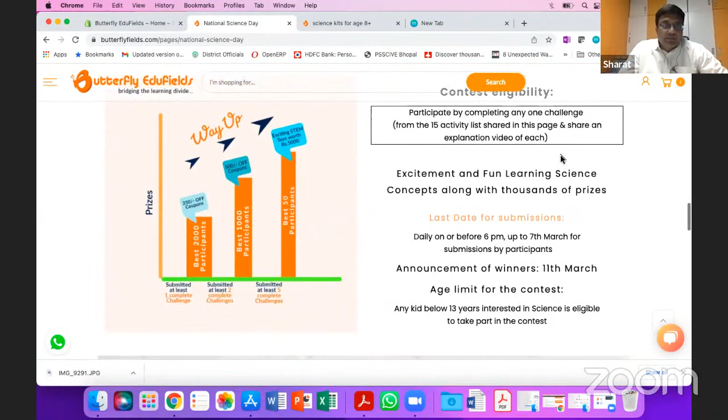So this is all part of the contests, and since schools are just starting to open up from next week, we are encouraging kids to do stuff at home, like learning how submarines work.

We believe that understanding is thorough when we can explain it to a 6-year-old child. As simple as that, how parachutes work, how animations are made, how holograms work. So different science and technology concepts for children, shown through videos.

There are also a number of kits available for children to understand the concept of rainwater harvesting. This was created so that children also understand the importance of sustainability, how much water gets wasted, how to calculate through the area, and how many centimeters of rain fall.

This is some effort, and I was personally privileged to get a chance to interact with Dr. APJ Kalam, when he said this should not just be a privilege for private school students, but that we should make an effort to reach out to children across the country, those who are less privileged.

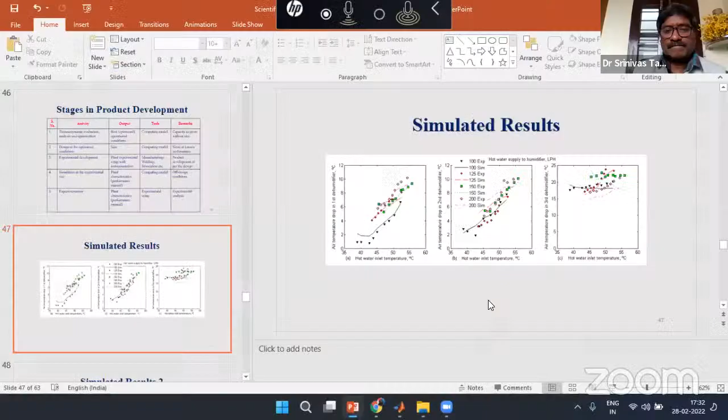As per the time permits, I will restrict my presentation to a few examples only. My presentation is focused on scientific and engineering approaches for sustainable solutions.

Science is actually a language of engineers. We are all aware that without science, it is difficult to develop technologies. It supports the dreams, the imagination. So the development of technology with the support of science is good; otherwise, without the support of science, it's incomplete or not perfect. Today my role is mainly to share my journey of technology development with the support of science. During this journey I have a few examples, mainly related to sustainability, how to practice sustainability while developing technology with the incorporation of scientific approaches and methods. So initially, I'm giving a light on the role of science in technology development and sustainable technologies.

Since renewable energy practices sustainable methods, solar energy is a main base for all renewable energy resources. For example, the solar concentrating collector is one way to practice sustainable methods for collecting the maximum amount of solar energy, so that we can develop solar collection, storage, and utilization.

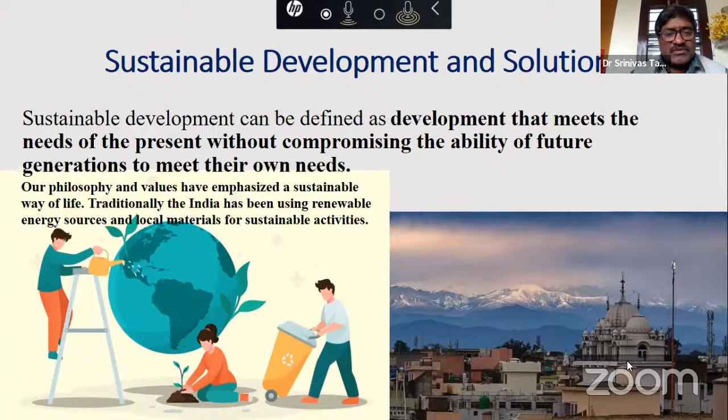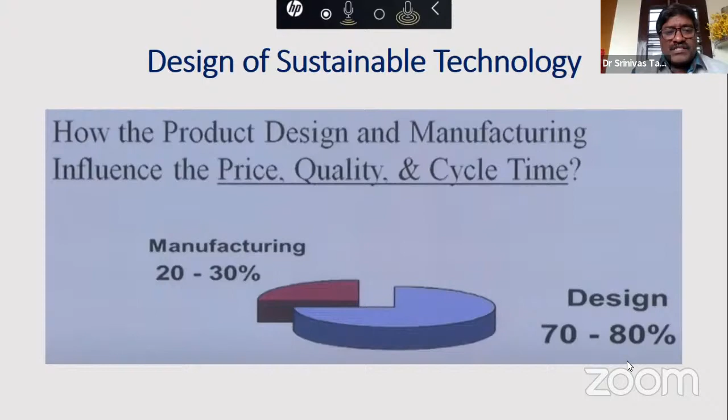In the development of technology, design plays a major role, because most decisions and policy making happen at the time of design. Coming to manufacturing, we see the development of the technology—product making or process making—done as per the design. That's why product design and manufacturing have different roles. The first and primary function is design, followed by making, that's manufacturing. The design governs the price, quality, and cycle time.

What I'm showing here is how to incorporate these basic rules of science in technology development, with the main focus given on design. For example, from 1818 to 1970, features have been incorporated over time into a product, and now we see a well-defined product with multiple features.

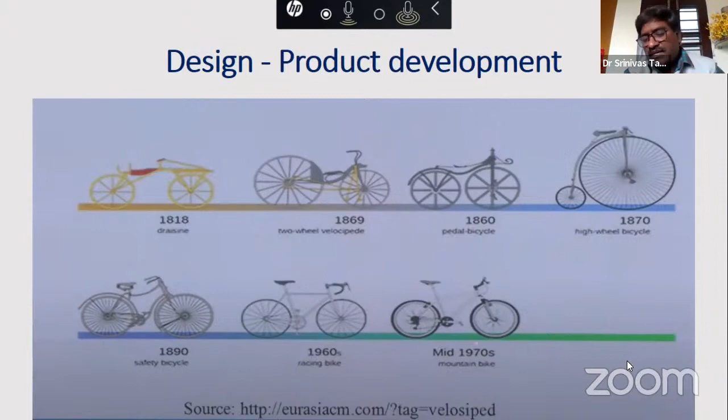In this product making, there are many steps, which can be grouped into non-engineering and engineering activities. Non-engineering mainly focuses on market survey, economics, etc. Engineering has the functions of product design, which includes modeling, simulation, optimization, and cost estimation.

Non-engineering starts from defining the need of the product and finding the probability of success—if it's a low probability, we drop that idea; if high probability, we approach market analysis and planning of the product. Then there's a feasibility check, whether it's practically feasible or not. If feasible, we give design instructions to manufacturing—that's product making.

During these steps, if we feel there is a refinement needed in the product design, or a chance of redesigning, the feedback can be incorporated into the R&D department. The customers may say the idea is not feasible, or the idea may change completely. That's why it may be iterated with the new idea, and we can repeat the cycle again.

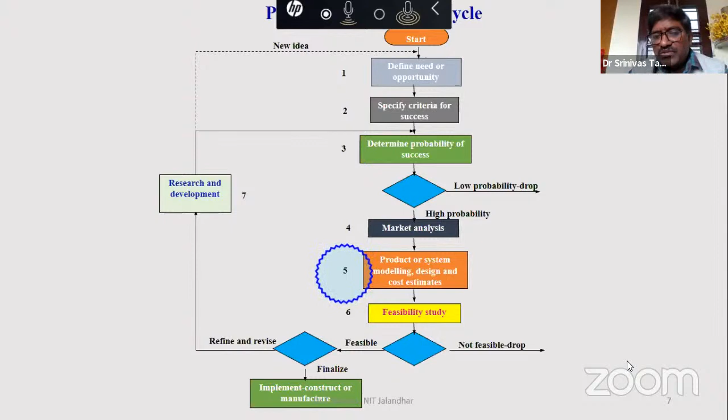If the engineer follows all these steps, both non-engineering and engineering, it's easy to develop a refined, perfect product with the help of scientific guidelines. According to science, it can be grouped, especially in product manufacturing and design.

Two categories we can group into: one is pre-design activities, and the next is post-design. In pre-design, mostly the focus is without minding the dimensions.

For example, to design an air conditioning unit, we generally specify the capacity required, let's say 2 tons. For 2 tons of air conditioning, we can design the process conditions like pressure and flow rate required, and how much refrigerant we have to charge in the machine, without minding the size or dimensions.

So pre-design work gives the best conditions, meaning optimized conditions based on parametric optimization or design optimization. From this, we can prepare the specifications.

According to the given specifications, a company or industry can manufacture the product and then undergo testing for market launch. But after launching into the market, there are some activities too. Those are called post-design activities.

In fact, the post-design activities give more useful information compared to pre-design. Of course, pre-design is mandatory as the platform for the design. If you see any product, it is very difficult to operate at design conditions due to variables.

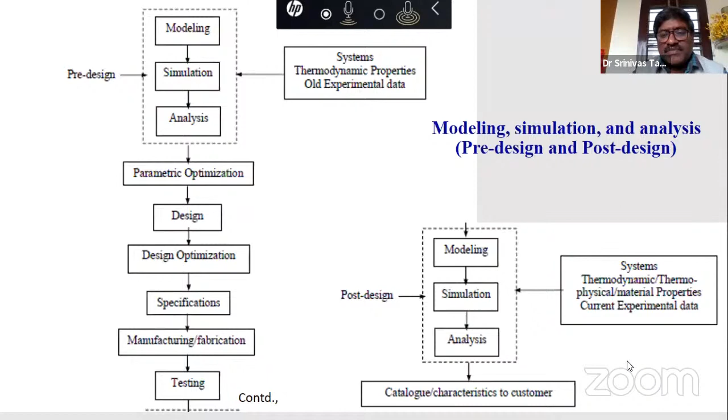So the customer may expect some catalog or characteristics of the product, which gives more useful information for operation. In pre-design and post-design, science plays a major role, providing useful data for manufacturing as well as from the customer point of view. We can prepare specifications as well as catalogs or books from the post-design works.

To demonstrate these scientific activities and planning, especially for pre-design as well as post-design works and modeling, I'm giving a few examples here. The first one is tracking of the collector, meaning how to track the solar collector from one point to another.

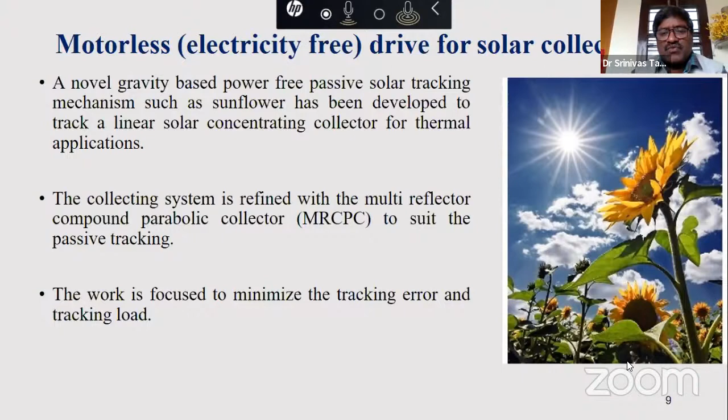Here our target is that we are not supposed to use any battery or motor electricity. That is the constraint here. According to our constraints, we are not going to use any electricity. That's why we are calling this product Motorless, or a passive type of solar tracking system that can be used to drive the collector, especially the focused collector, maybe a line-focused collector or point-focused collector.

It has been designed to be compact, meaning a lightweight product. It looks like a perpetual motion machine. As per thermodynamics, there is no such thing as a perpetual motion machine. This is imagination only, but to describe the nature of the laws of thermodynamics, this concept has been introduced.

What I am saying is this motorless tracking looks like a perpetual motion machine. It's not using any electricity, meaning there is no energy conversion visible. It is using energy, but not in a visual form—it looks like magic. That means one form of energy is converted into another form of energy; instead of electricity, we may use stored energy.

Even in the earlier days, in place of petrol and diesel, if you are pouring water and saying that we can run the vehicle, somebody may laugh, but that's possible. You know what has the hydrogen? Hydrogen can be used to drive the fuel cell that may be used in automobiles. So similar to what fuel cell car and automobile, it's possible to drive the collector using this water.

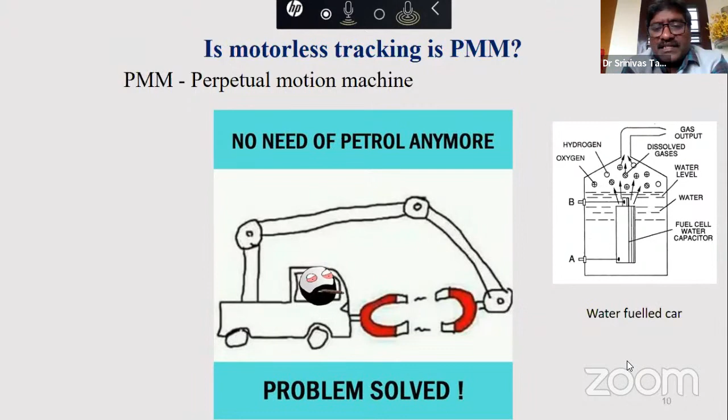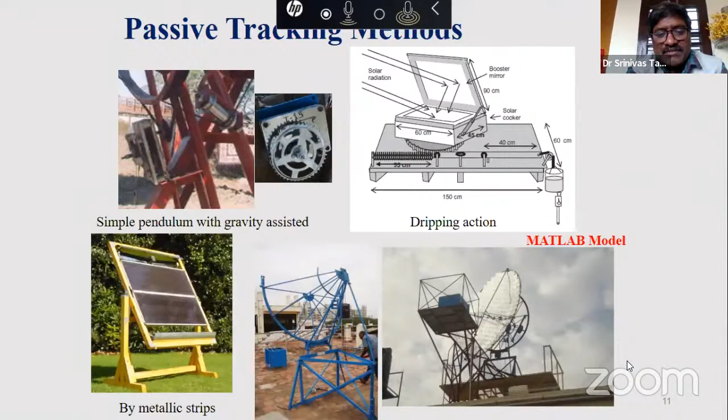That's why it may not be water, maybe some other potential energy or kinetic energy we can use, like action of the simple pendulum, action of water like dripping action, or bimetallic strips, and gravitational energy like dead weight here. And here we use the scientific principles.

The main science involved here is the solar geometry. So we need to understand the solar geometry, sun-earth relations, so that it's easy to design the solar concentrating collectors. That's dynamically changing from sunrise to sunset, and yearly also it is changing. And place to place also this geometry is changing. First of all, we have to clearly understand the background science, so that it's easy to design a collector.

It's with a zero incidence angle. That means always, like sunflower, it's possible to tilt the face of the collector towards the sun, so that the normal to the surface and the sunbeam both will be the same line. We will expect the zero incidence angle. That is the target. That means the sunbeam as well as the normal to the collector, if both are matching, then we can say this is a perfect tracking system. That means zero incidence angle, theta is equal to 0.

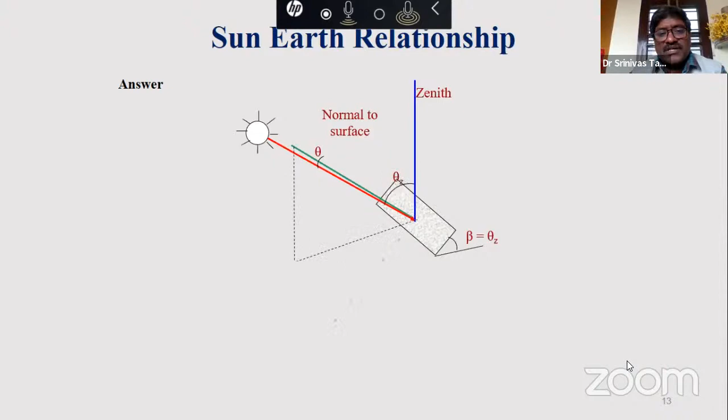So during this design, it may be single axis tracking or double axis tracking. We have to keep in mind this solar geometry. At the same time, we have to put into constraints whether the product we are designing is compatible to all places like north, south, or other countries.

Because the day length is changing. Some places, at the poles, the day length is 24 hours with 6 months night and 6 months daytime, whereas at the equator it is 12 hours almost. So here the day length is changing. Whatever product we are designing, it has to work in all places and all seasons.

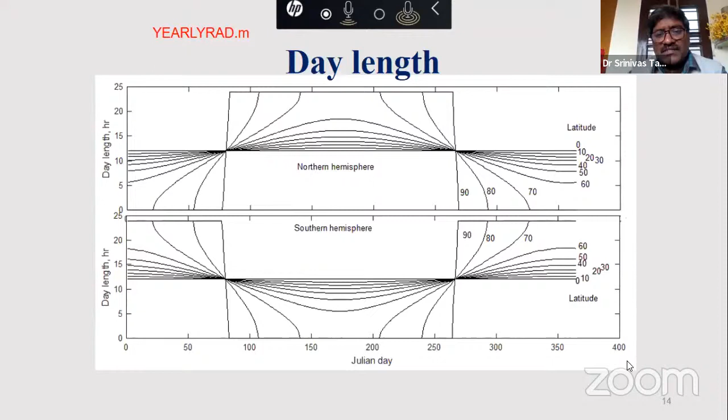That's why, for example, if it is designed at a certain angle, 30 degrees in Jalandhar, we have to select the maximum length, let's say summer. We selected the maximum summer because the day length in summer is long. That's why, according to the long day, it is designed.

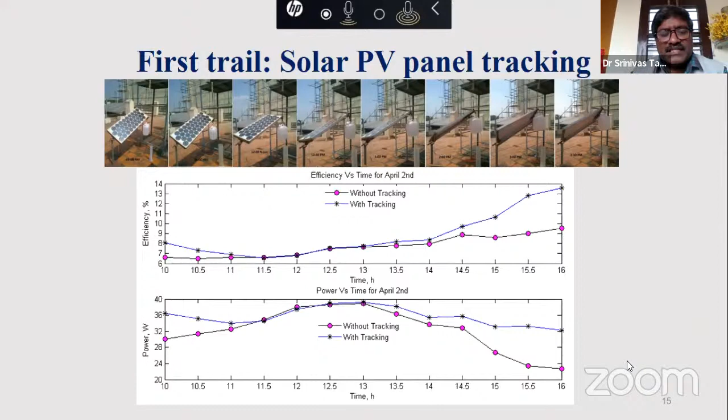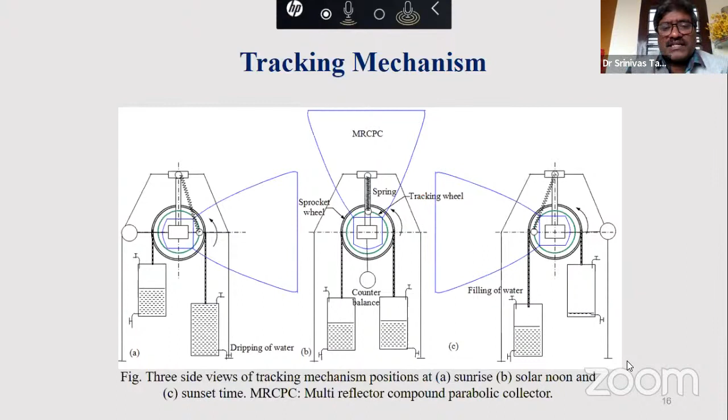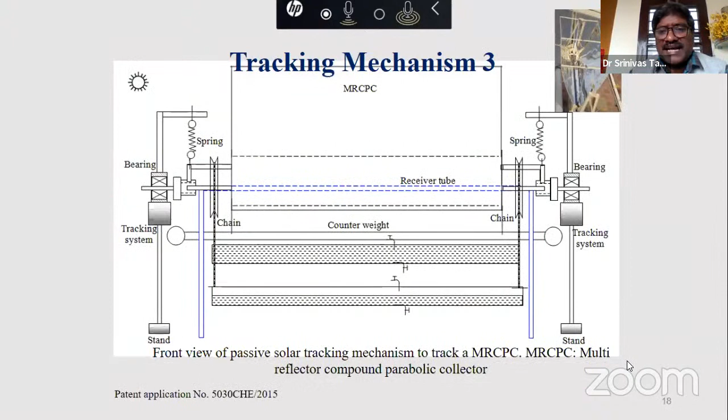At the initial step, we successfully tracked the collector, like we are seeing the small solar PV panel. Without using electricity, we are able to track the collector from sunrise to sunset. In the second step, second trial, linear concentrating collectors like parabolic collector, compound parabolic collector, or cylindrical parabolic collector, we try to track from one point to another point. All the elements here are mechanical elements. You can see the tracking systems having mechanical components like suspensions, etc.

While designing, we can choose some options like there are some drives. The shaft we can drive about the focus point, or about the center of gravity, or about a point outside the collector. Out of these 3 points, every option has certain merits and demerits. That's why there is a chance to optimize the system, and based on this comparative study, we can select the best one.

For example, about the focus, it's fine because the receiver tube need not move; the fluid we can supply at the inlet as well as the outlet without moving the receiver. That is one of the advantages. That means the solar receiver is a stationary element. Without disturbing the receiver, we can transfer the fluid. Whereas in the second and third options, the receiver is not stationary, it is moving because it is away from the point of tracking.

But there is an advantage with center of gravity: there is no need of counterbalance while tracking, because we will add the counterbalance for the equilibrium movement of the collector from one point to another point. But in the last option, a point outside the collector, there is more rigidity we can expect from this collector because the shaft is complete, whereas in the first and second methods, the shaft is not complete, it's in segments.

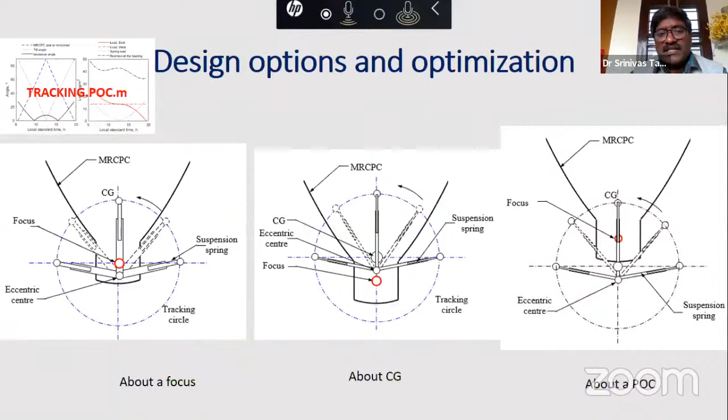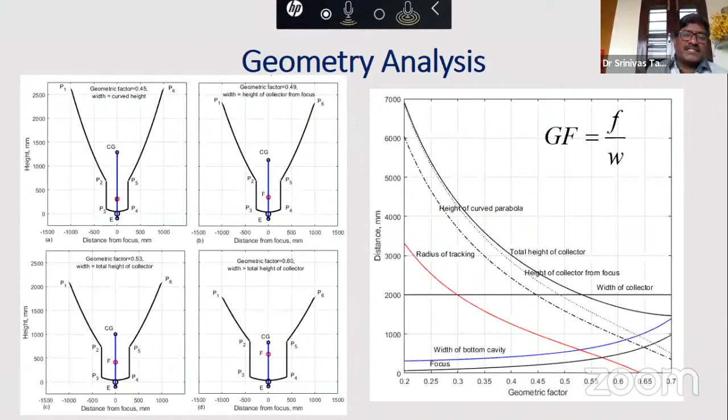During the design, we can check these options and see optimizations like geometrical or parametric optimization. This is shaped optimization. If you see a geometric factor like focus and cavity width, increasing this geometric factor increases the shape of the collector. That means to gain maximum collection efficiency, we can select a higher geometry factor because the collector is opening and the center of gravity is moving towards the ground. Even in automobile engineering, if the height of the vehicle decreases, more stability is expected. Here also, we can expect more stability from the solar collector.

Then the science has been applied for the dynamic study, modeling this collector from sunrise to sunset, that means morning to noon, again noon to evening. It gives the physical conditions like how much weight is required to track the collector, because the potential energy has been used to drive it, and that has been simulated from sunrise to noon, again noon to sunset.

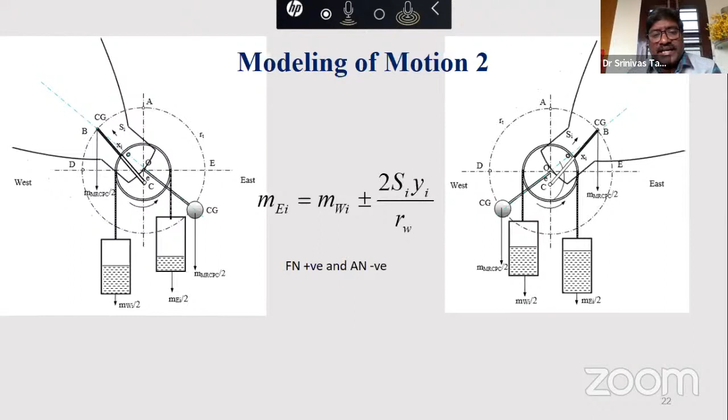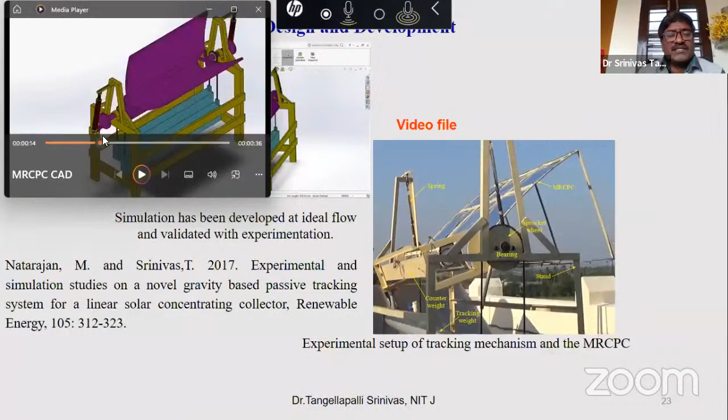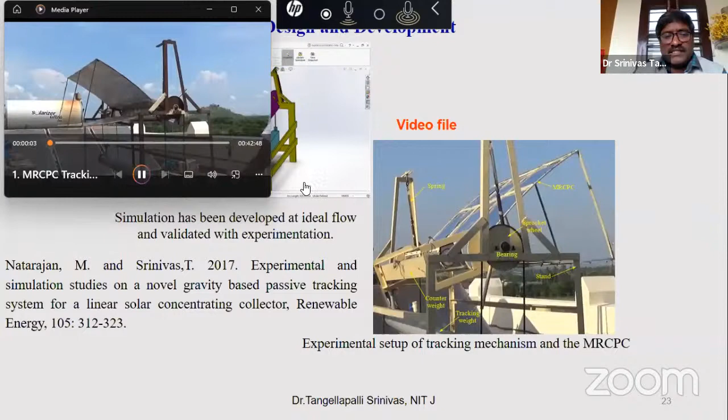I'll show the imagination and planning of this collector in terms of scientific tools, like software such as CAD and modeling, etc. After getting some idea, this science shows how the product can be manufactured and what the basic elements of this product are, how it is working. Then we can switch into making according to the instructions provided by this design. That means both are integrated, that is the design process. The first one is the design process and second is the manufacturing.

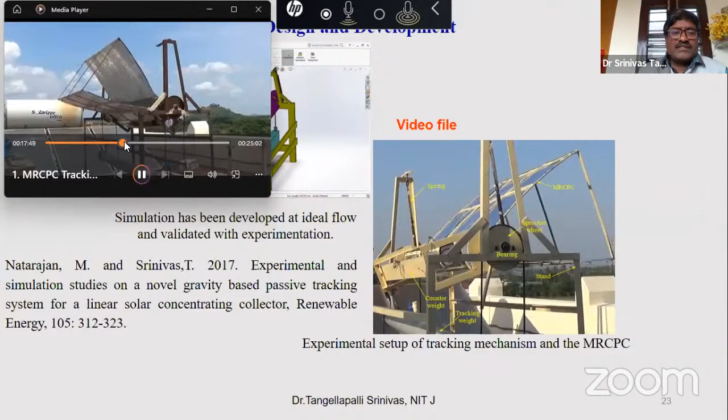But we have to take care about the design. Once there is a mistake in the design, it is very difficult to fix, because there is a lot of loss in making a product from a wrong design. That's why at each and every step in the design we have to take care before making the product.

There are many highlights we can show from this product. One is the tracking element here, which is independent of the weight of the collector. That means we are giving some mechanical elements like suspension, springs, etc. Since the counterbalance takes care of the mass of the collector, the tracking mechanism is independent of the solar collector's mass. That means the collector may have 100 kg weight or 1000 kg of weight, and without bothering about this mass, we can design this mechanism. That is one of the main advantages of this system.

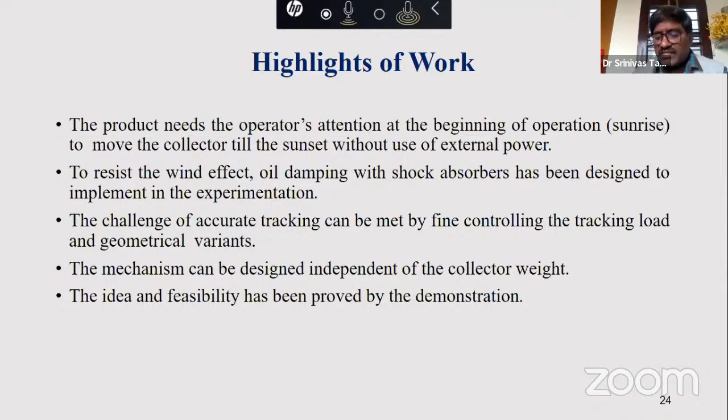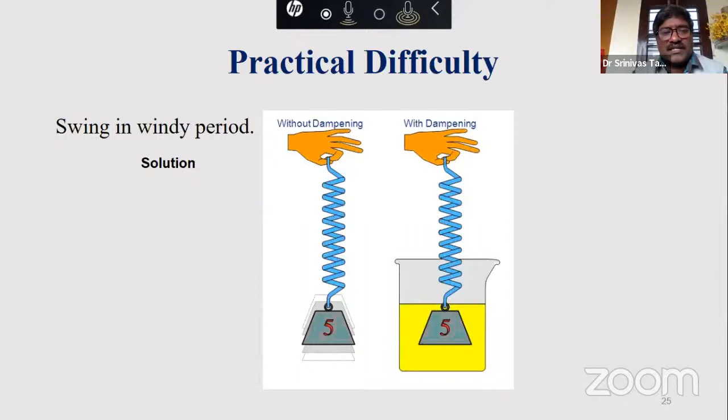This is the invention. But during this process of implementation, that is testing, we didn't include damping. That means we simply used dry springs without minding the damping. But from feedback obtained from the field, we added dampers and suspensions so that now it's driving without much vibrations, because sometimes during windy times, vibrations and oscillations come that are completely arrested by these damping solutions.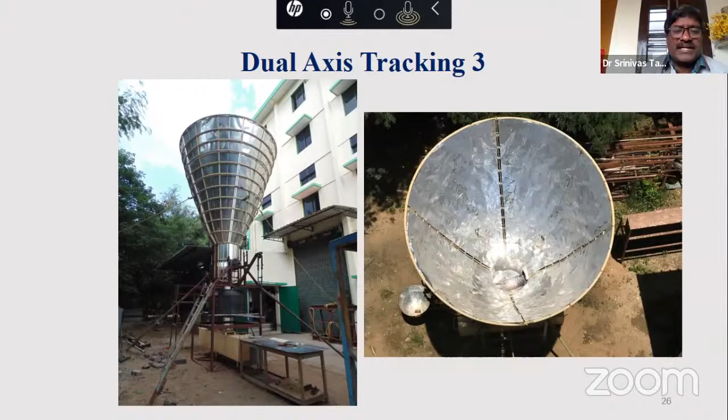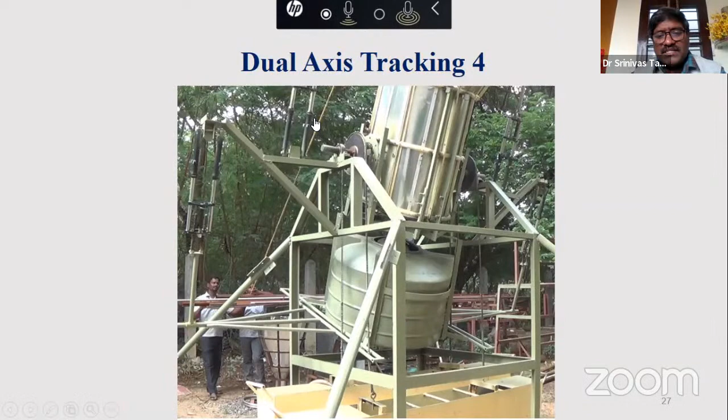Now what are the ideas I'm explaining here? It may not be plane areas or linear like a cylindrical concentrating collector. This can also be applied for a point-focused concentrating collector, which can be used for very high temperature generation. This is a point-focused collector. The weight of the collector is nearly 1 ton, and you can also see the suspensions here. We use hydraulic suspensions from the automobile industry, and its backside is a counterbalance, and it is running without much vibrations.

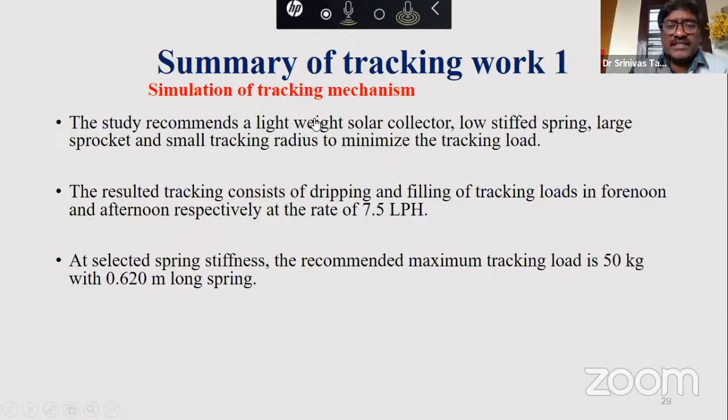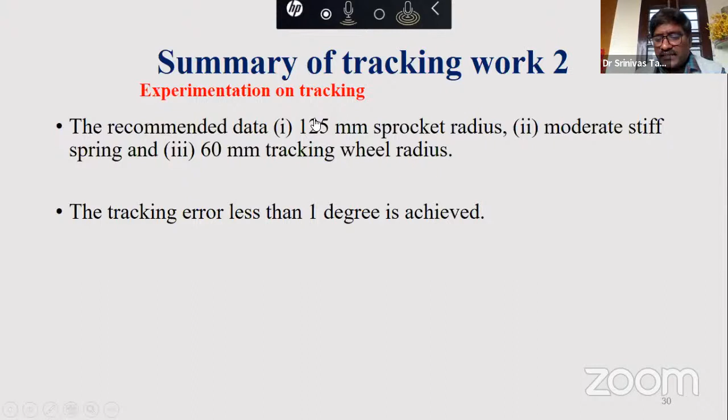This scientific work, modeling and simulation in both pre-design and post-design, results in specifications like how much flow rate we have to maintain, how to control the lowest weight of this mechanism—everything we can optimize. These are some of the results regarding the elements and quality of the mechanical elements, like stiffness and sizes, dimensions of wheels, sprockets, etc., and how much accuracy we can expect here. We got less than 1 degree error, which can also be refined further in future iterations of this product.

Similarly, the second point is the integration of systems like energy systems for multiple benefits, like I told earlier about the smartphone—similarly the features of the phone like video, photo, internet, WhatsApp, etc. have been integrated. Energy also—if you see the systems, if you combine the energies, there's no need to purchase different systems separately, like an RO plant at home, lighting, air conditioning, and cooling system.

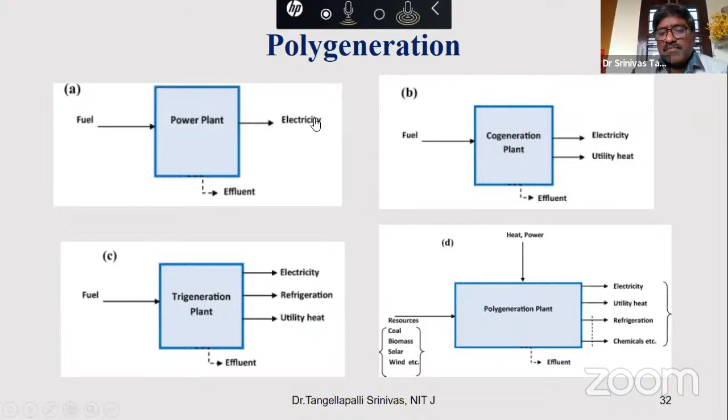There are many applications in cooking. If you think about a complete total system like polygeneration, it is derived from cogeneration and trigeneration. That means multiple benefits from one energy source, similar to how a smartphone gives multiple functions from one device.

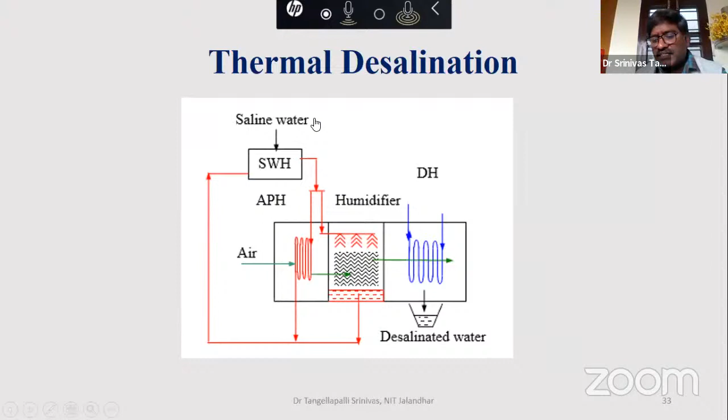This has been practiced with the desalination plant, which has been created using an artificial water cycle. We know rain comes through the basic principle of the water cycle, so the same cycle can be created artificially to get condensation, which can then be used to create soft water.

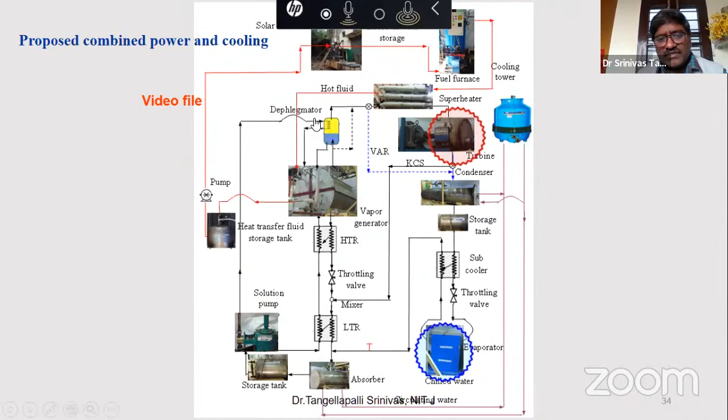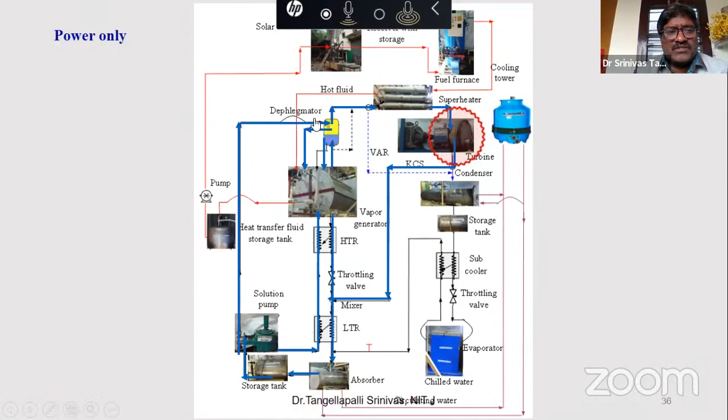This slide shows the integration of two elements, electricity generation and cooling effect, from a single source of energy - solar energy. This gives flexibility. Once we integrate different elements, we get more flexibility in operation, meaning mode 1, mode 2, mode 3, etc. - only power, only cooling, or combined power and cooling.

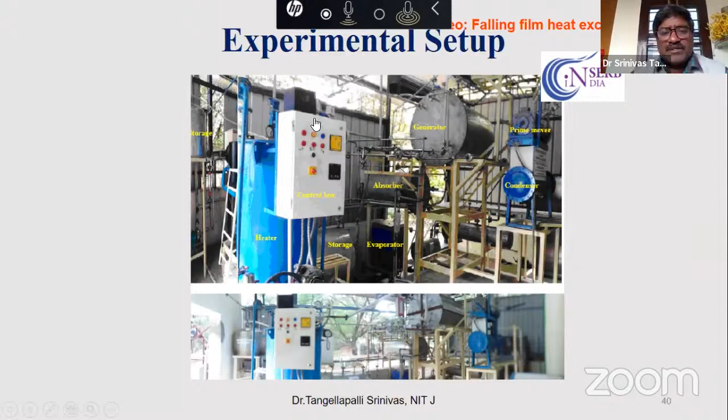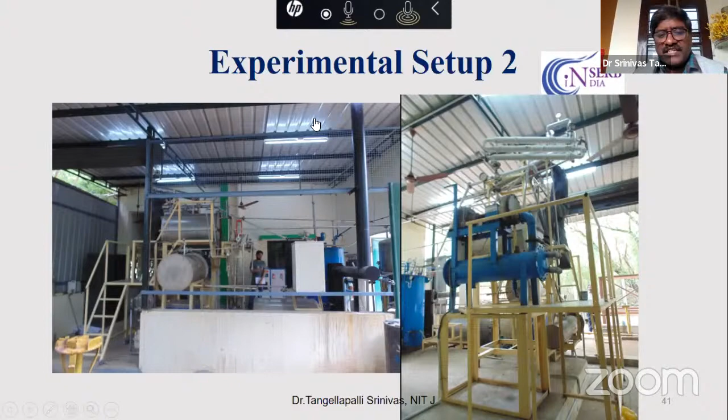These technologies can be developed in different modes so we get the benefit of multi-objective functions. We can also demonstrate innovative materials and innovative designs like heat exchanger design, so that cost is minimized and overall energy conversion benefit is maximized, through experimentation and testing after complete scientific design, in both pre-design and post-design stages.

This is also a similar hybrid system. It gives drinking water and electricity. The name of this plant is trigeneration, meaning triple benefits from one source of energy: electricity, drinking water, and the cooling effect.

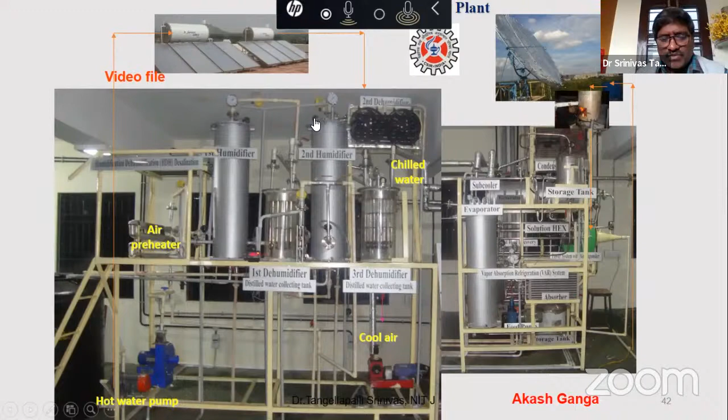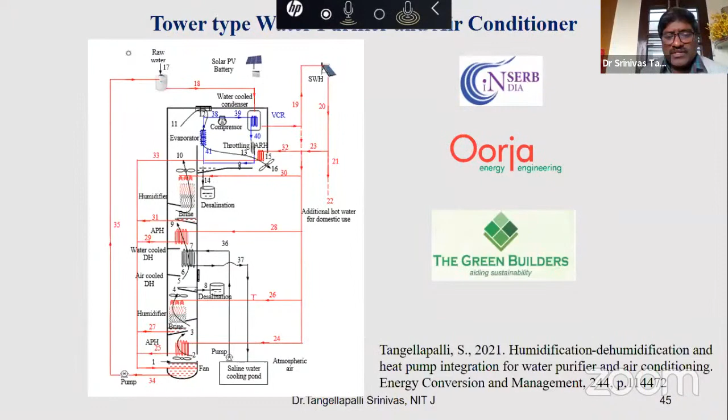The cold air can be used for a centralized air conditioning system. This can be practiced at a small size at the domestic level as well as the industrial level. We are currently doing this work in association with industries - one from Hyderabad, Oorja Energy Engineering, and one local green builder, because these hybrid technologies can be used for green building systems. There are various steps involved in pre-design and post-design systems.

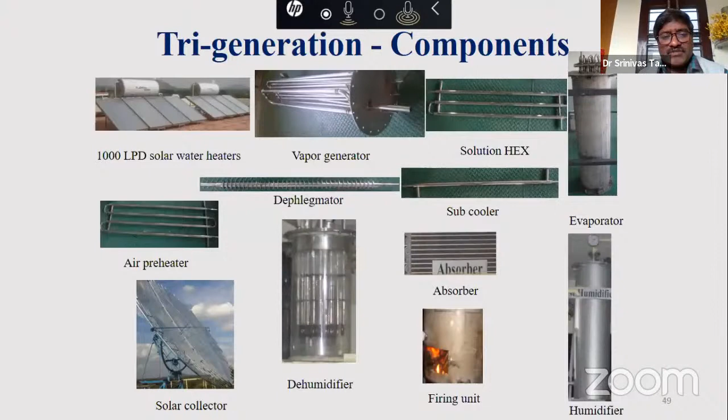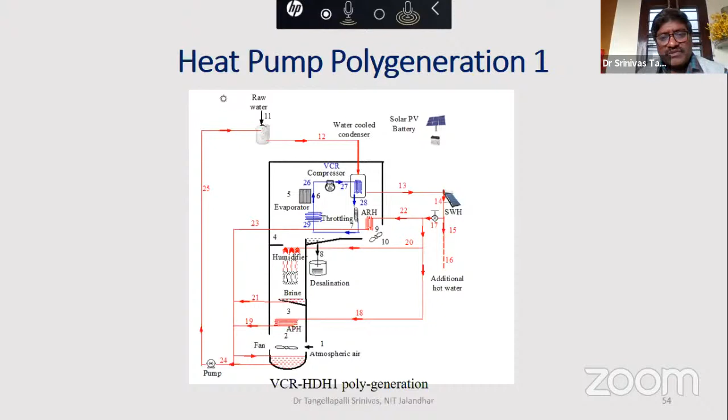Now coming to the next step, the cogeneration and trigeneration system has been upgraded to polygeneration. This system is currently under progress. It gives hot water, drinking water, electricity, and cooling - four benefits from a single source of energy.

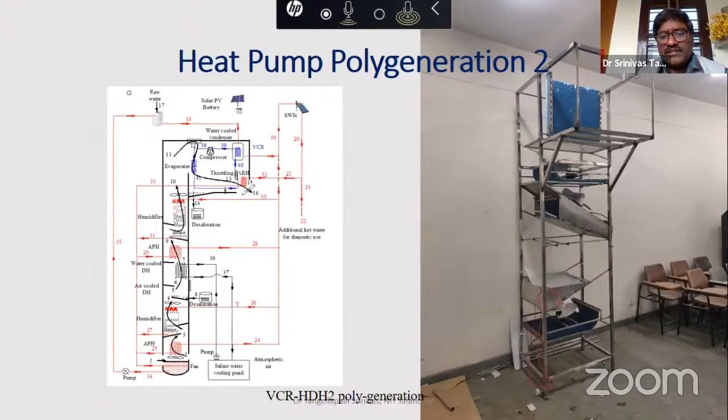This is under process now. It has multiple stages. For low cost, we can design single stage systems like heat pump systems. In case the industry or commercial unit needs more yield, then we can go for multiple stages, like 2 stage, 3 stage, etc.

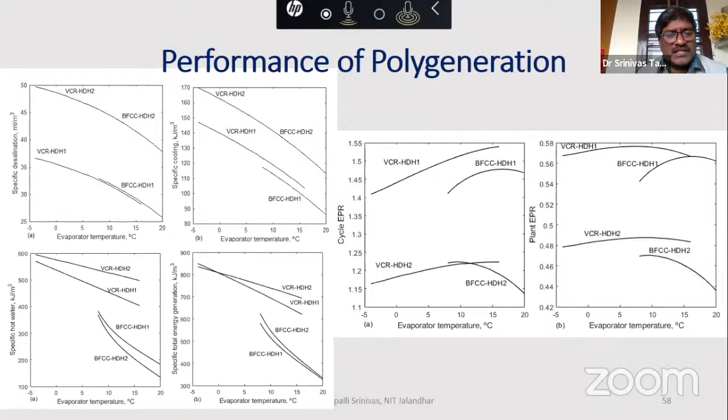This is another design of polygeneration. But the scientific approach, like simulation, will give definitely what type of system is required for the customer. For example, a customer may focus more on output than energy efficiency, while another customer may expect more efficiency, not minding the output. So according to customer expectations, we can design the product, and those conditions can be designed with a scientific approach. All this is now available on the internet and published in articles, so those interested may Google it for more information.

Thanks to the government, especially the Indian government, for supporting my ideas and helping turn the dream into reality. And thanks to all again for giving this wonderful opportunity.

Solar and integrating the cameras and the latest smartphones and all those things - that is really a good lecture on the part of Dr. Srinivas Garu. And also, you described and displayed very nicely how product design, modeling, and manufacturing has influenced the price, quality, and cycle time.